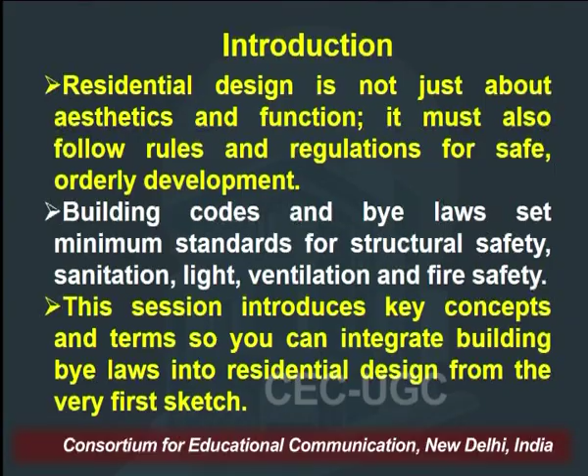So important terms that you need to understand are standards, norms, regulations, bylaws and law. Standards refers to the fixed and the established rule. Norms are authoritative standards and they are followed in a generic way. Regulations are prescribed orders and are known to be followed by all the developers. Bylaws become the law of the local authority which has to be followed and is a mandate for all designs that you will be making.

And law is the rule of that state and cannot be broken. Breaking a law is a punishable offence. So bylaws is also the law of the local authority which has to be followed by all design developments that you are going to make. So we need to integrate legal safety requirements from the very first sketch.

So when we are starting with the design process, all the designers need to understand how to make and what to make. So the what part is the quantitative aspect of any design and it links directly to the building bylaws. And we have to align all our design, and if we are talking about residential design to be specific, it has to follow the master plan, town planning policies, the local authority requirements, and all this information you will be getting in the master plan of that particular area. For example, in Delhi, Master Plan 2041 is still in the process of working and the Delhi building bylaws give you the local data with which the design has to be compliant.

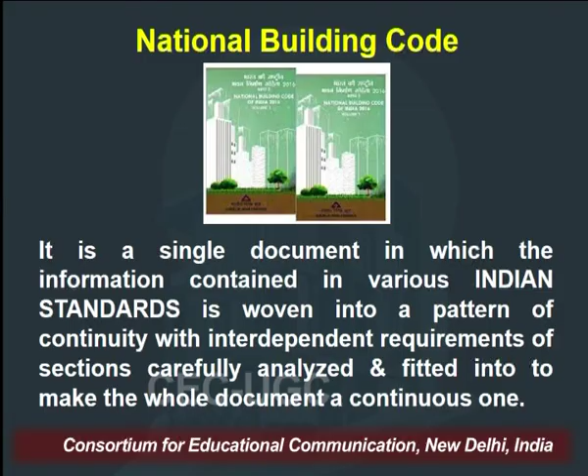So, we need to understand why we have to follow the building bylaws. So, a building bylaw is a local law framed by the local authority. The local authority knows and understands what is the requirement of the particular area, as it is working on it at a very micro and grassroots level. It channelizes efforts to achieve the concepts and policies outlined in the master plan of the city in order to give the particular architecture to the city.

For example, Jaipur, the pink city: the building bylaws have made it mandatory for the heritage city of Jaipur to be painted in pink color to follow the particular architectural character of the city of Jaipur. So, these bylaws are the law of the local authority. The local authority will be depending upon what is the requirement of a particular area, and it has to be followed. So, students, when you are working with the bylaws, you need to understand what is the current context and what are the local bylaws.

So, if the local bylaws are not available, you are going to refer to the model building bylaws given by the Government of India, and the National Building Code 2016 has to be followed. But all development which is done through proper way and channels have their own bylaws. So, Delhi will have their own building bylaws, Haryana will have their own building bylaws, Pune will have its own building bylaws. So, all the cities, either it is tier 1, tier 2, tier 3, every city have their own set of local building bylaws which have to be abided by all development, and residential development becomes the part of it.

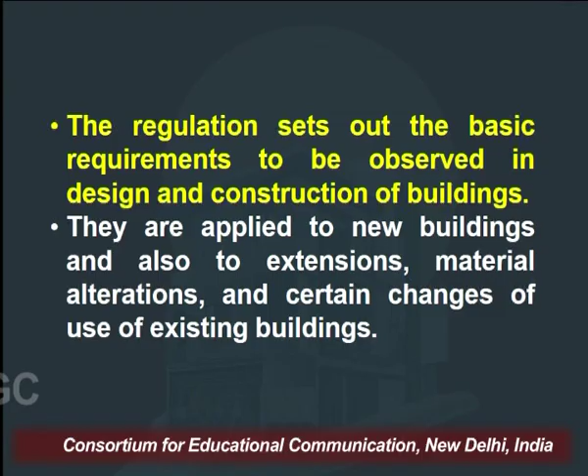So, building bylaws by definition are defined as the standards and specifications designed to grant minimum safeguards to the workers during construction, to health and comfort of the users, and to provide enough safety to the public in general. The regulation sets out basic requirements to be observed in design and construction of the building. They are applied to new buildings, also to the extensions, material alterations, changes, and everywhere you need to make the change, the bylaws are important.

So, we also need to understand who makes the bylaws. Bylaws are made by the local authorities or the state government, and when the local authorities and the state government don't have the bylaws, you have to follow the model building bylaws given by the Government of India or the National Building Code. So, these bylaws are framed by local town planning authorities such as DDA, BMC, etc. It lays down rules for building safety used during the construction and occupancy and post occupancy. The central government has framed the model building bylaws 2016 which need to be abided, and when there are state bylaws or city bylaws, they have to be followed in alliance with the model building bylaws.

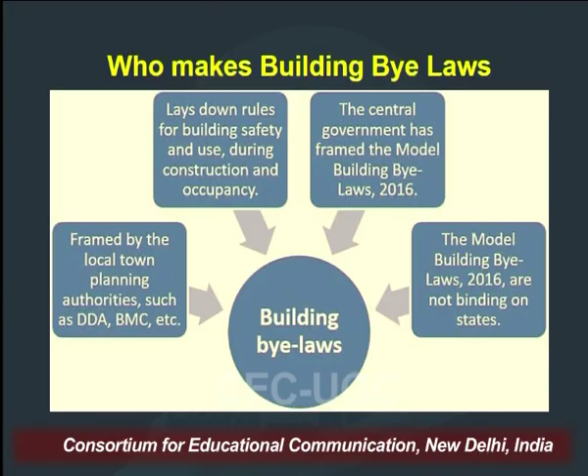So, objectives of these bylaws are very basic and very simple. It makes it easier for designers and developers to pre-plan all the building activities. That means compliance to these bylaws is very important. It allows a disciplined and a systematic development. It gives guidelines to the designing architect how much to make, what and where he has to put a curtailment in it. It prevents haphazard development.

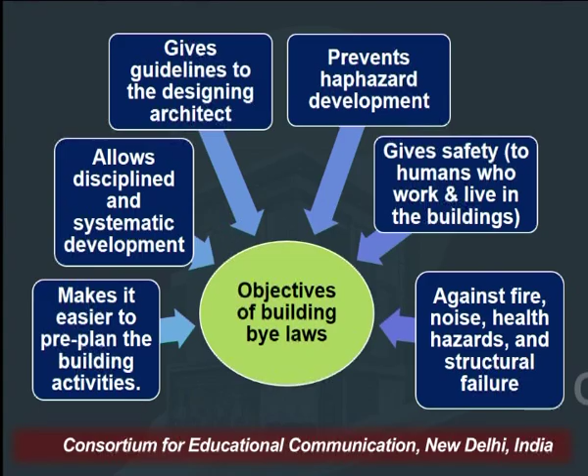It gives safety to the humans working or living in the building, and has a very important role in the safety aspects. Be it fire safety or any structural hazard or any failure of the structure that can happen, or noise, anything which can cause any problems to the building in future per se.

So, types of major zones are classified into 5 major zones. They are residential, commercial, industrial, hazardous and educational. So, the residential zone is basically where the residential buildings will be housed. There could be gardens, playgrounds, schools, offices are allowed, but industries, hospitals and wholesale markets are not allowed. So, only the activities pertaining to the residence will be included in the residential zones.

Commercial means anything which would earn you money. So, cinema, retail shops, town halls, restaurants, banks, offices, shopping centers are all allowed. But in commercial, residence will not be allowed, hospitals and industry will not be allowed.

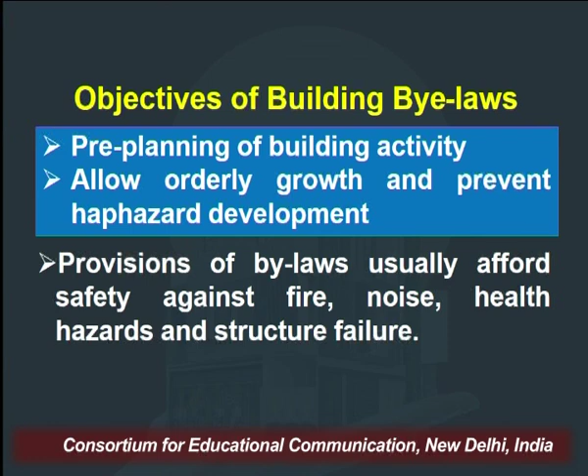So, proper utilization of space has to be maintained so that efficiency is achieved in the overall space planning. They provide health, safety and comfort to the people who live in the building, and due to these bylaws, each building will have proper approaches, light, air and ventilation.

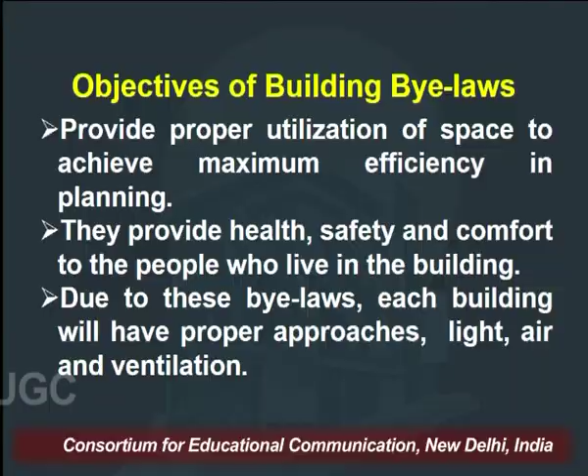So, next we need to understand how and where these bylaws are applicable. So, students, all these bylaws are applicable to all new construction. Any addition and alteration you are making to the building, it will impact that also. If there is a change in use of the building, for example, a residential building many times is converted into a school or say a daycare center, in that case also the bylaws have to be applied and taken care of.

And if any development of land is being done, then also building bylaws will have a role to play, and in any kind of demolition activity also bylaws have a very major role to play. So, these bylaws are implemented on various aspects of the residential design. It will be impacting the site and the boundary of the building, the side boundary, what is the length, what is the breadth,

building frontage line, its distance from the road, how much space has to be left, all these are written in the bylaws. For different purposes, different functions, what is the minimum plot size, because every function will have a certain decided plot size, and the plot size will also decide what is the limit of the construction. So, these impact both ways.

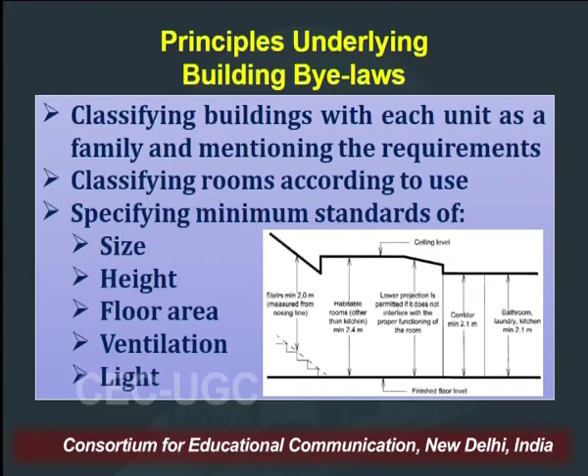On that basis, rooms are classified according to usage. For example, for residential design, we have a specific room called bedroom, we have drawing room, living room, kitchen area, bath and toilet area, storage area, parking area, etc. So, depending upon the requirements of the family, the bylaws have a certain set of quantitative values. These values specify the minimum standards for the size of the room, the height of the room, the floor area of the room, the ventilation requirements, the lighting requirements, the services requirements. Every aspect will be covered depending upon what type of household and the number of households in the one building.

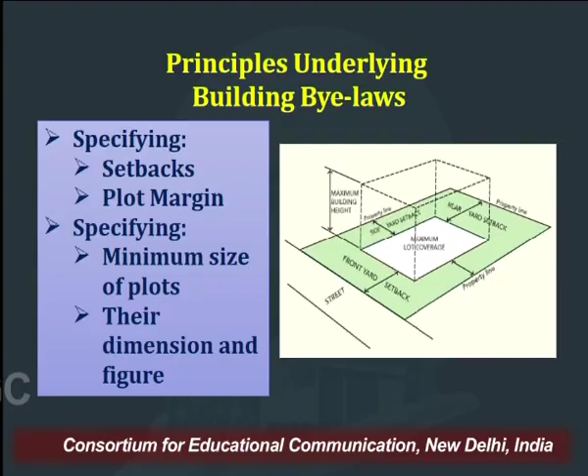It also specifies the setbacks, it specifies the plot margin, it specifies the minimum and maximum size of the plot and their dimensions. Dimensions meaning length and breadth. What is the overall geometry of the plot that you are going to work on. So, again these aspects are very clearly mentioned in the bylaws and have to be taken care of while you are designing the overall building for a residence or a home.

So, for students you need to understand what is the household size, and depending on that household size you will be specifying the overall size of the plot, and depending upon the size of the plot, the bylaws would give you the numbers for setbacks, plot margin, and the overall width of the street will also impact the overall plot sizing. So, that is again done by the planning aspect.

So, let us understand what is the plot area. Plot area simply means the total land area enclosed by a boundary. That is the jurisdiction in which you will be working, that this is the plot and in this you have to work and make the design. So, that is the land which is possessed by the client and offered to you for designing or consultancy services.

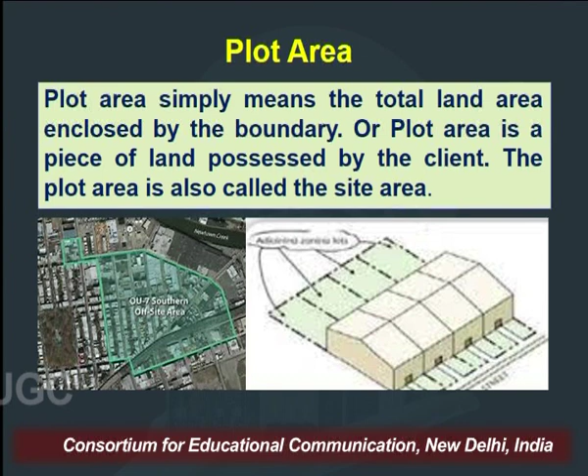So, this plot area in technical term is called site area. So, students please note, from here onwards we will be referring to plot area as the site area. There would be a lot of discussions on site area when we are going to discuss the site analysis in our next to next lecture.

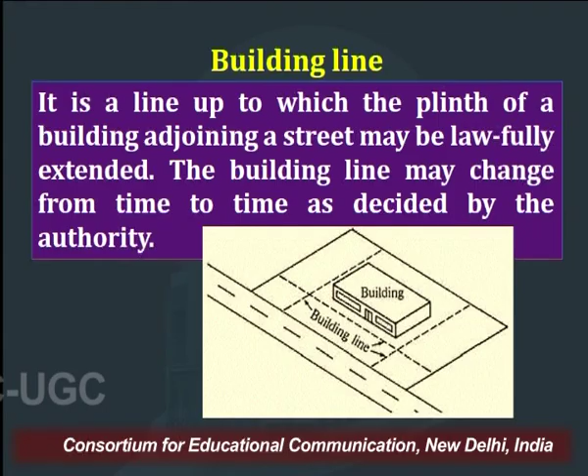Another important point after the plot area is the building line. It is the line up to which the plinth of a building adjoining a street may be lawfully extended. The building line may change from time to time as decided by the authority. So, that is the line beyond which you stop your construction. So, that line has to be maintained, and this would further be converted into the setbacks. So, there are certain do's and don'ts when we are working with the building line.

So, building line is the line beyond which you cannot extend your construction work. Your development cannot encroach upon the road that is being given. It is the right of way, ROW, and has to be followed by every development. Many people make steps and ramps which encroach upon the road. That is not correct, that is illegal and has to be taken care of when designing.

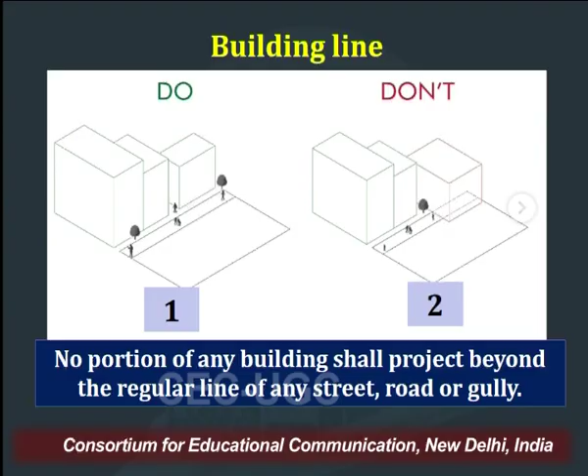Another aspect of building line is the projections of the chhajjas. So, the chhajja projection which comes on the floor above. Any kind of projection will not cover the road or the street, it has to be free from that. So, movement of the pedestrians will be ensured only by the proper construction of boundary wall, and chhajjas have to be within the site boundary, which comes as a part of the building line.

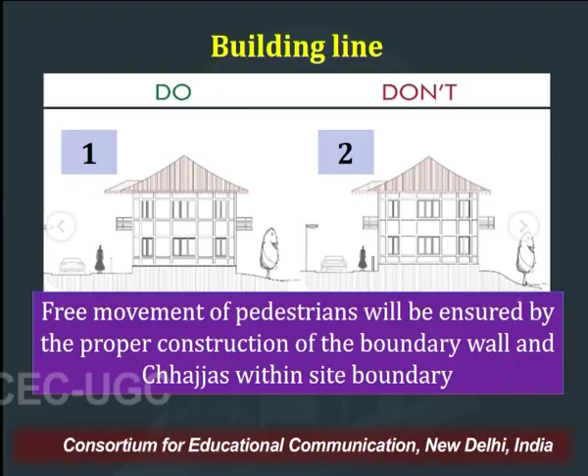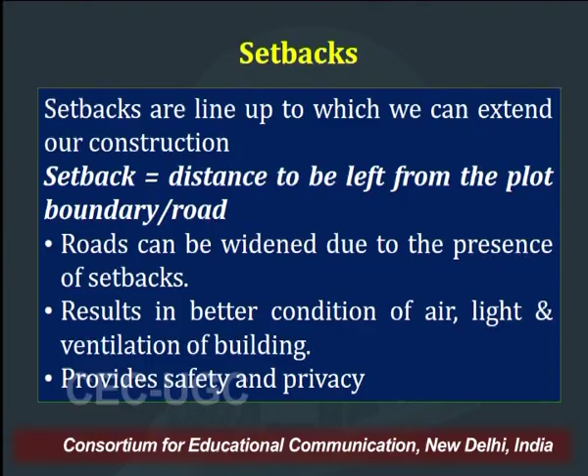So, moving ahead, the building line converts into setbacks. These are the lines up to which we can extend our construction. Setback is basically the distance to be left from the plot boundary or the road. Roads can be widened due to the presence of setbacks, resulting in better conditions of air, light and ventilation, but the setback has to be taken care of. So, the setbacks or the margins, there are 3 types of setbacks that we have to work upon. So, these are the margins.

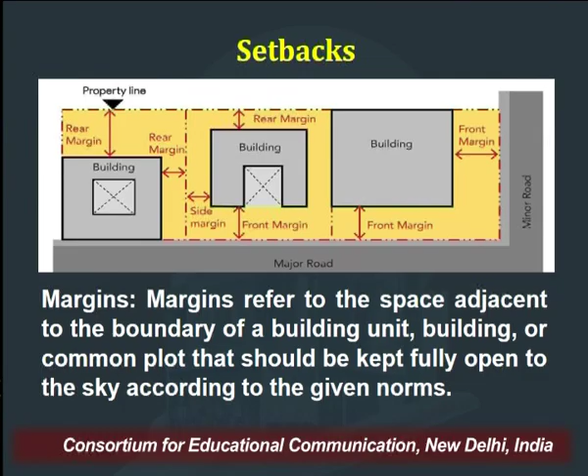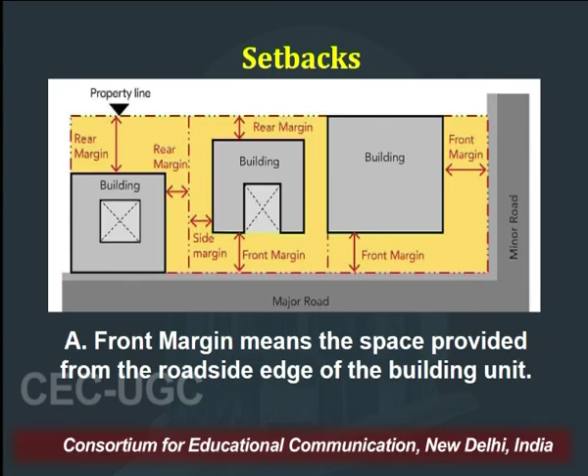First is the front setback, which is the site boundary that we talked about, the margin beyond which we cannot extend onto the road. The front margin is the space provided from the roadside edge of the building unit. The side margins are the spaces provided from the sides to the building unit, and rear margins are the space provided at the rear of the building unit. So, these 3 have to be taken care of when we are working on the site boundaries. We will take these details further in the quantitative aspect of building bylaws in design in our next lecture.

But today's key takeaways are that building bylaws are local legal tools for safety, health and comfort. We cannot ignore them. We need to understand what is plot area, building line, setbacks and margins, what is buildable versus open areas, and architects must balance creativity with compliance to create safe and healthy homes.